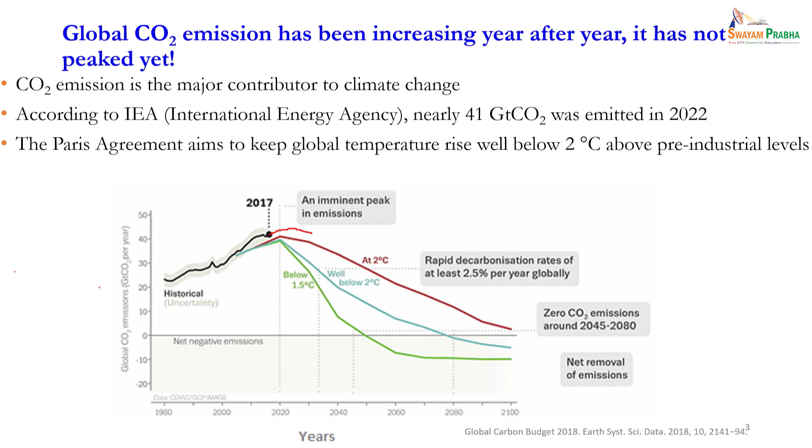If you look into this, if you have to go below 2 degrees, you have to go below 1.5 degrees. If you are supposed to be at 2 degrees, these significant CO2 emission cuts are needed. We will talk about it later, but let's go back to this slide again.

So, what we see here is that in the 5 or 6 year duration in which we will emit another 250 billion tons of CO2 into the atmosphere, it basically means this is the bus which we have already missed. We will not be able to keep the global temperature below 1.5 degrees of the pre-industrial time. So, if in pre-industrial time the temperature was say 25 degrees average, it is assumed that it will become 26.5 degrees average in another 4, 5, 6 years.

So, if we really wanted to keep it below 1.5 degrees, most of the technologies which we have already developed must have been implemented right now. It is not working at this pace. So, this is gone. Let us now look into the 2 degrees scenario. For the 2 degrees scenario, that is, you have to avoid a 2 degrees rise compared to pre-industrial temperature, the carbon dioxide budget which you have is roughly 1150 billion tons.

Now, this is a number; it does not mean that this is the exact number. This also tells you that if you emit more than 1150 billion tons of CO2 into the atmosphere, there is a 50% chance that the global warming temperature will be beyond 2 degrees of what it was in pre-industrial time. So, let us assume 50% chance is what we are now talking about.

Here also we gave that same number. So, 1150 billion tons of CO2 is what you can maximum emit. And this basically brings us to this very important point: this is your lifetime target. It's not a target for 2050 or 2070 or 2100. If anytime in the next 100, 200, 300, 500 years you go beyond this number, the temperature will go beyond 2 degrees centigrade. So basically it means the lifetime target we have is 1150.

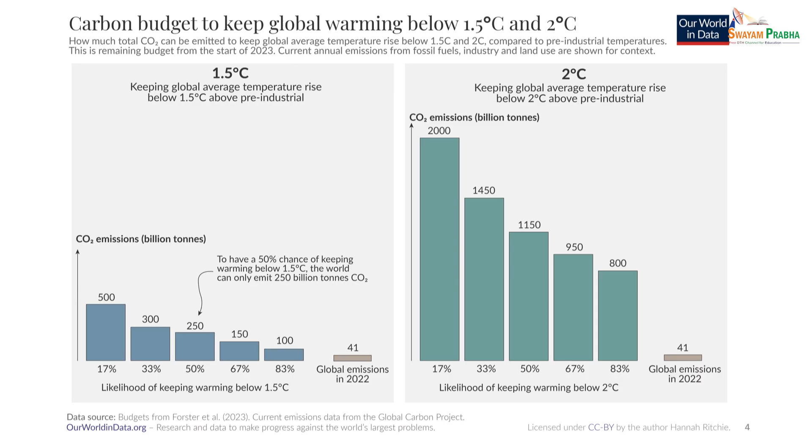So this is why IEA wanted to target this by 2050. If they can somehow emit 50% of what they are emitting today, then they will be able to meet this target and they will be fairly below that 1150 number. That would ensure that the global average would be such that the temperature will not go beyond 2 degrees in the near future. This is the challenge. So 20 billion tons of CO2 cut is the challenge. Now this is the benchmark which we have. If we have to cut down 500 to 700 billion tons of CO2 from today till 2050, what has to be done?

You will have to break down all those sectors from where there is CO2 emission. Power sector is the biggest culprit. Most of our electricity comes from burning fossil fuel, either coal or other forms of fossil fuel, oil, gas, whatever. If you are burning coal, this is the worst, because coal is mostly made up of carbon. You are burning coal to produce electricity, that's the product, but there is another product in this process, that is carbon dioxide. C plus O2 will give us CO2. CO2 is a product. Energy is actually a byproduct which we use. The actual product is CO2.

Now what is the challenge? We are saying that we will run a process where we will capture the product and put it back. This is a big challenge, a big task. So far in human history we have not done anything like that. People typically compare such things with pollution control. Pollutants are typically byproducts, at ppm level. SOx, NOx, carbon monoxide, particulate matter, all of these which we have somehow handled, from the tailpipe of vehicles or from point sources, we have only handled byproducts which are not even 1%.

Today we are saying that we will capture the product itself, and it's not available to you pure. It comes as a 10% mixture with the remaining 80 to 90% nitrogen. This makes it even more difficult. So this is the challenge, and this is why it's a very tricky situation, what you will do so that you will become net zero. This is why the title was net zero, not CO2 capture. We have to always keep that in mind. The focus is on net zero. It's not about CO2 capture, producing more green energy and all. Focus has to be on net zero.

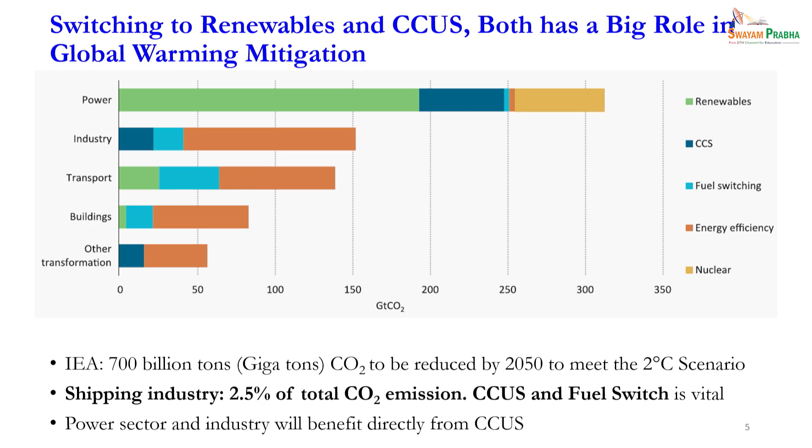So in 2022, if you consumed X amount of coal, in 2023 India consumed 1.08 X amount of coal. So even in today's CO2 constrained world, we are forced to consume more coal, because at the rate we are growing, we will not be able to grow if we stop consuming coal. So this is where that 5% comes from. Let's move on. The take home message of these two slides is: 1.5 degrees is gone. 2 degrees is what we are targeting now.

Now if you have to target 2 degrees, one of the two options in this slide is to move from fossil fuel based energy sources to green energy sources. That is going to reduce your CO2 footprint. And whatever CO2 you are producing because of materials, electricity and all those things, you will have to capture that CO2, utilize it or sequester it. These are the two steps we have to understand. What are the challenges in these two steps?

So first, is it easy to go from a fossil fuel based energy economy to renewable or green energy? Let's look at the data India has shown so far. This data is from 1985 to 2022, and it shows the renewable energy mix of the Indian economy. This renewable energy is basically coming from hydropower. We have done a significant amount of hydropower installation in the last 25-30 years. Solar, wind, biomass, waste, geothermal, wave, tidal, all of these put together, we are actually going down.

With so much talk about biomass, geothermal and all, given the rate at which our population grew and the rate at which we grew between 1985 and 2000, without looking for clean energy sources, we installed a huge amount of fossil fuel based power plants, and this is why in the total energy mix, we started at 25% and went down.

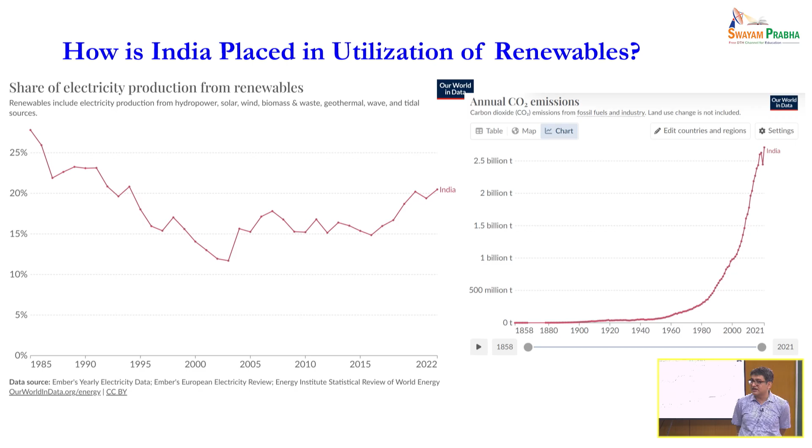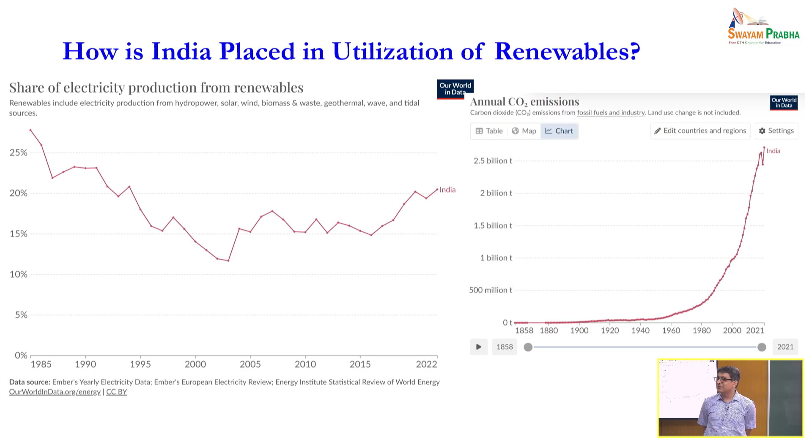And if you are the second largest economy emitting CO2, then the entire onus would be on us to reduce the CO2 emission. Even today, in Azerbaijan, at this last COP, other countries started saying China and India should not be considered developing countries, they should be considered developed countries. As soon as they count you as a developed country, you will have 100% onus on reducing your CO2 emission. Right now there are a lot of funds you can utilize from the World Bank and others. So those challenges are there, let us not talk about that.

Moving on. So this is the story of green energy. I do not want to talk too much, but let me tell you there are other challenges over here, whether these are net zero processes or not, and if it is really a net zero process, for how long it is net zero is what we also have to understand.

So this is the installation of solar. I know that we are increasing nicely, we have not reached our target, but that is not a problem. The problem starts later. When we talk about solar energy, it is an energy which has a plant load factor of roughly 20%. What exactly is plant load factor? Those people who are in industry would understand it better than the students.

Plant load factor means that if I have installed capacity of 100 megawatt, how much I am actually producing from it. For example, in solar energy mostly, sunshine is only 6 hours a day maximum on average. We have to average over the entire year. Summer time will have more sunshine; monsoon time, like in Chennai, from the last 2-3 days we have not seen sun. Winter time in northern India will see no sun for many days. So on average you have sunshine for 6 hours a day.

It basically means you will have to install 5 times what you actually need. It basically means that the plant load factor is 20%. If I install 5 times, only then will I have enough during the 6 hours of sunshine to utilize that electricity for the remaining 18 hours when I do not see sunshine. So this is why the plant load factor of solar energy is very poor.

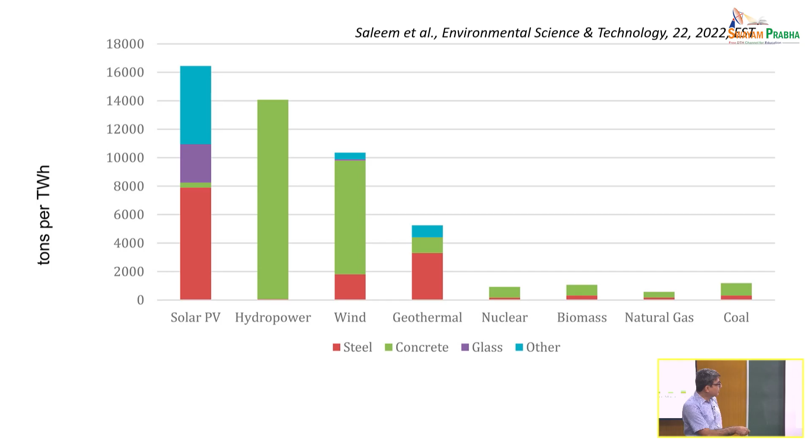So the point I am trying to make, if you now start looking into how much CO2 you have already emitted. These processes will emit CO2 while you are producing the electricity. This process will emit CO2 while you have put the plant itself. So there is CO2 emission in the capital expenditure of this process, and this is during the operation of this particular process. Okay. Now let's look a little deeper.

Typically, when you are producing 1 kilogram of a material in a single step or dual step process, you would roughly produce 3 kilograms of CO2 if you are using fossil fuel to produce this material. For example, on average 1 kg of steel will produce roughly 2.5 kilograms of CO2. So similarly, any other material you produce will have a CO2 footprint. If I am going to produce 16,000 tons of this material to produce 1 terawatt hour of electricity, I am already producing 48-50,000 tons of CO2.

Now you have to understand that we are doing 5 times the required installation, because even though I need only X kilowatt hour of electricity, I will have to install 5 times that because there is only a 20% plant load factor. So that 50,000 of CO2 footprint, 5 times that becomes 250,000 of CO2 footprint. So while these processes do not produce any CO2 while producing electricity, they have a CO2 footprint which has to be divided over the lifespan of the solar panel.

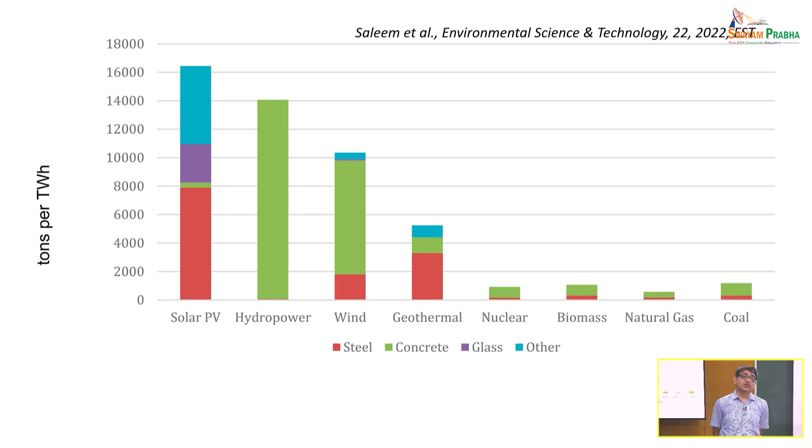Why they have not peaked? Because we are continuously installing new solar panels, new wind energy, all kind of things, even though we have sufficient capacity from fossil fuel. Okay, now when these new installations are coming, and as per this discussion, these new installations are actually adding the CO2 into the atmosphere, it is not reducing. So if these installations are not running for 5-10 years, it is not going to bring it down.

So this is why this peak, you are not able to predict it, because you are not taking into account that the new installation which has to happen has already emitted the CO2 for the next 10 years. Okay. Otherwise, over these 10 years, this fossil fuel base would have slowly emitted those numbers. This you have already emitted at once. So the more you do green right now, the more CO2 will come into the atmosphere at this moment for a short period of time. The challenge will start when you see technology advancement.

5 years down the line, a faculty will tell you, no, I have a solar panel which is 25% efficient. Today you are running a solar panel which is only 15% efficient. Change your solar panel. So 5 years down the line, you will be forced to change your solar panels. So when you are changing your solar panels 5 years down the line, what will happen to the CO2 footprint? Will we become net zero? We will not. This is the challenge.

Okay, and this is bound to happen, because in 5, 6, 7, 10 years time, you will see that the efficiency of the solar panel, even the technologies, will be changing. You will need new technology, more efficient and all. So you will again have to do the same thing. So it's a step where we cannot jump there, we cannot reach there, that we will become net zero by so much time. It is a step change. It takes time to do all this. It does not happen automatically.

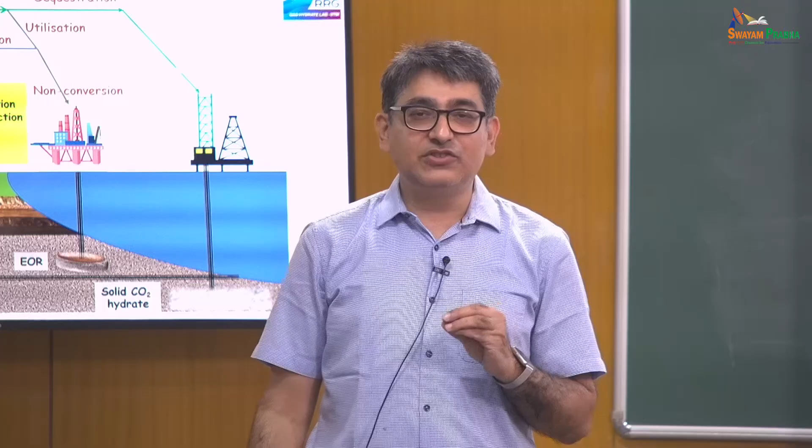So this was the story of green energy I wanted to tell you. The take home message is, don't assume that green energy is 100% net zero today. It's not. Okay. I gave an example of a solar panel, but if you talk about a turbine or anything else, for the blades, you don't know how much material has gone into those blades, and those are not simple blades. They are designed materials, which basically means that these materials have gone through 5 different steps. Carbon fiber goes into it.

Where do you get the carbon fiber? Does it grow on a tree that we will get and put there? No, it does not happen. This carbon fiber has gone through multiple steps, high temperature processes and all, and has emitted a huge amount of CO2 which we are not counting today. Okay. So each of these materials are the solutions which will make us net zero. I am not saying that they are not going to make us net zero. They will make you net zero, but it will take some time. Right now you are emitting all the CO2. So this is why this peak prediction is very difficult for us to do.

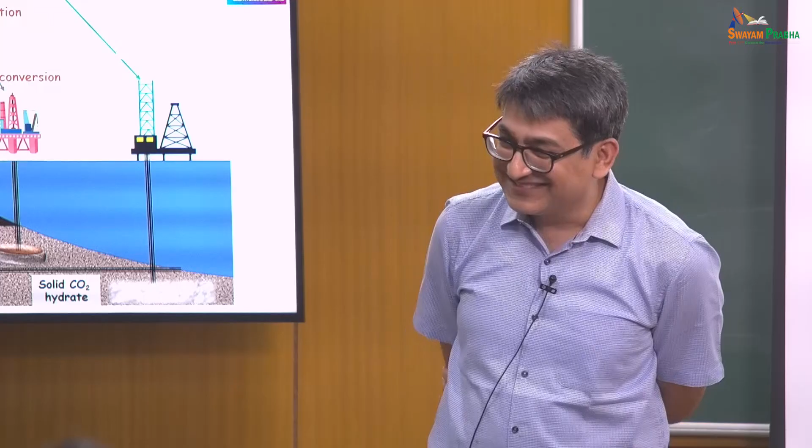So that green energy thing is done. Let's now look at CCUS, because this is another area and one focus of this particular class. How much time do I have? Okay, no, I have enough time, don't worry. I will talk about the problems first, solutions we will talk about slowly. Solutions are difficult to come by, it's easier to explain the problem.

Okay, so now when we talk about carbon dioxide capture, utilization and sequestration, CCUS, this is actually a 3-step process. What exactly it means is that first you will have to capture the carbon dioxide. Most of you are chemical engineers, it's basically a separation process. We are separating carbon dioxide from other gases. Okay. What are these other gases? The other gases which come out during the combustion of coal.

Why do we have to worry about it? Because coal is a solid. Okay. And you have to burn the coal with a gas. The other reactant is a gas. So when I have to react a solid with a gas, there is a problem. As a chemical engineering problem, there is a bigger problem, because a solid has millions of molecules in this much space and a gas has few molecules in this much space.

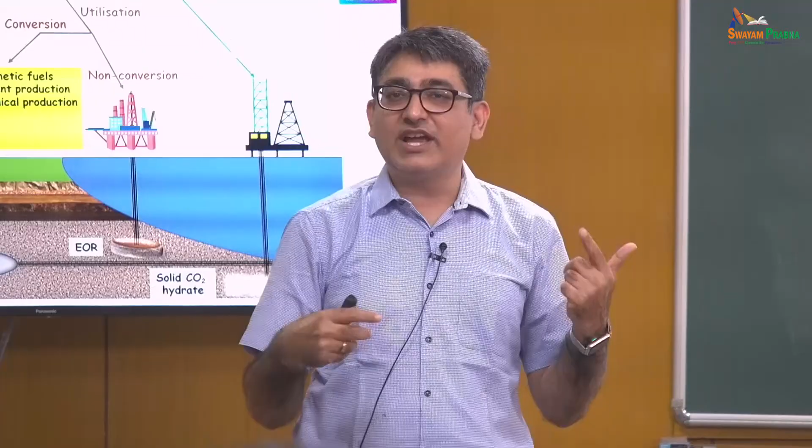And if these two have to react together, the reaction has to happen 1:1. So if I have to make this true, that is, the reaction has to happen 1:1, I have to compress the gas, and I will have to pulverize the coal. Both I will have to do. So this is why the combustion typically happens with excess supply of air.

If it does not happen with excess supply of air, then instead of carbon dioxide you will produce carbon monoxide. You don't want that, because it is a poisonous gas. CO2 at least is not a poisonous gas. It's loved by the plants. So you might die, but plants will survive. The human civilization will evolve again, which has happened multiple times. So it should not be a problem. You don't want carbon monoxide to come out from this process. So this is why it's typically done at a very high pressure or excess supply of air.

Now why air? We could have done it with oxygen. It would produce only CO2 and a little bit of additional oxygen. Would that have been better? Maybe it would have been better, but when these power plants were designed some 40-50 years back, they said, oh, there is only 20% oxygen in the air. If you have to separate oxygen from the air, it will be very expensive. Why do that? Let's burn it with the air itself.

So 40 years back, we were worried about separating 20% oxygen from the air for combustion of coal. Today, we are ready to capture 400 ppm carbon dioxide from the atmosphere. So this is the story. What can you say? So this is the challenge. Air is what is now being used.

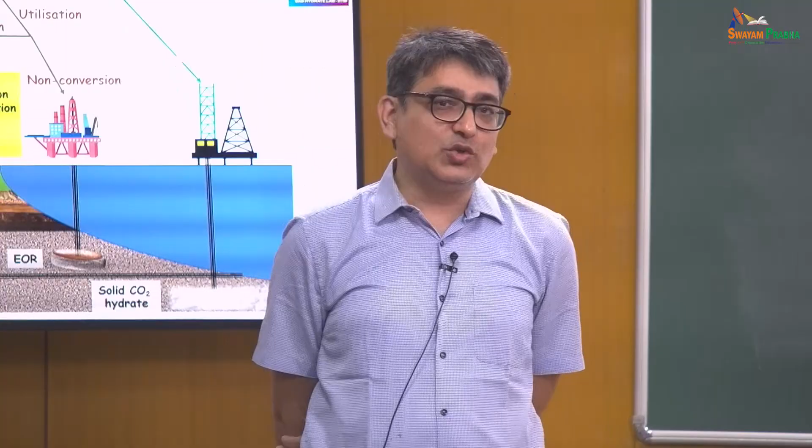When you are using air, it has roughly 80% nitrogen, only 20% oxygen, and on top of that you have to have excess air. So 80% becomes 85%, 90%. By the time the combustion happens, you will see that there is only 10% or 12% carbon dioxide, and the remainder is nitrogen. So the CO2 capture process is basically a separation process, a classical chemical engineering process of separating two molecules. Minimum two molecules will be there, one is CO2 and one is nitrogen.

But in reality, there are many molecules. CO2 is there, nitrogen is there, SOx is there, NOx is there, oxygen is there, all kinds of stuff that will actually kill you. But let's not worry about that. Right now, let's make it very simple. We have two molecules, carbon dioxide and nitrogen. Now the challenge is, there is a proverb: if there is a rotten apple in a basket, every other apple gets rotten.

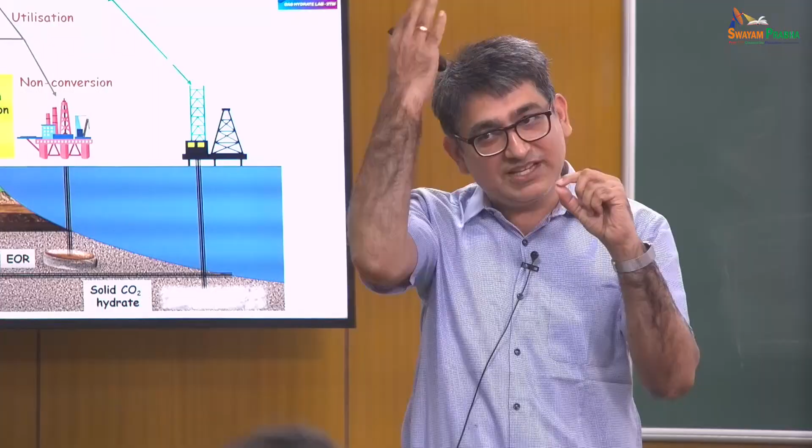So when one CO2 molecule is in the vicinity of 9 nitrogen molecules, this CO2 molecule will start behaving like a nitrogen molecule. You know why? Because the nitrogen molecule at room temperature has very high thermal energy. It's a small molecule. If you give a little bit of energy to it, it will jump like anything. If you are very light, you can jump. If you are heavy, you will not be able to jump. So at room temperature, it has a very high kinetic energy, and with that kinetic energy it goes and bombards the CO2 molecule. So CO2 molecules also start jumping like nitrogen molecules.

So what I was trying to do is capture a CO2 molecule from this mixture. If I have to capture someone and this guy is running, we need more people to capture him. This is the challenge. When we talk about capturing CO2 from a flue gas, a point source, there are roughly 9 nitrogen molecules per CO2 molecule. If I have to capture one person among 9 others, it's not that difficult. I should be able to employ 5 people and they will run and catch that particular guy.

But the second problem is, what if we have to capture one among 2500? What is that problem? That is direct air capture. This is the elephant in the room. People say direct air capture is the future, because we have already produced all the carbon we wanted from under the ground. Now there is plenty of carbon above the ground. Why unnecessarily dig under the ground for carbon? Let's capture all the carbon from above the ground.

We will convert it into chemicals by adding hydrogen. This is what CO2 utilization is. This is what has been talked about. The US is pumping billions of dollars. They give $185 as subsidy if you are capturing 1 ton of carbon dioxide directly from air. Okay, but look at the thermodynamics.

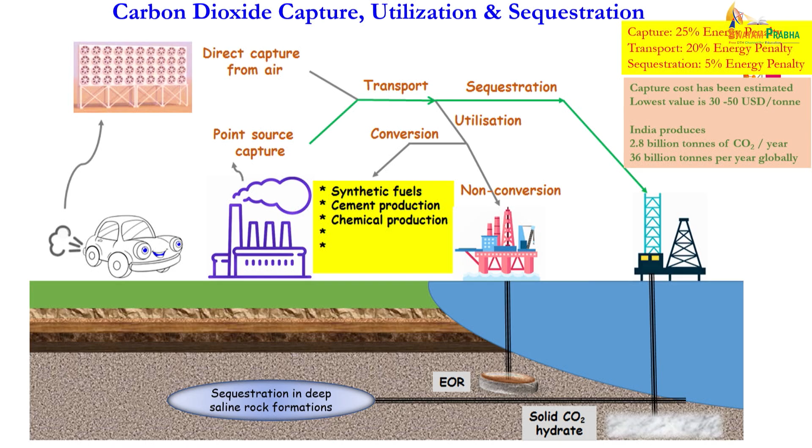Cost obviously is one which I have stopped talking about. The cost here, for example, the direct point source capture is roughly $30 to $50 per ton, or in terms of Indian rupees, it turns out to be roughly 4 to 5 rupees per kg. You have some representative from Technip, they may claim that they have a 3.5 rupees process, but I will tell you it's roughly 3.5, 4, 4.5, not less than that per kg. It comes out to be roughly $30 to $50 per ton from point source. And I am not even talking about many other processes which we will see later.

If I am going to capture this from here, the subsidy given is $185. So you can imagine what will be the actual cost. Now in India, if I have to capture 1 billion tons, multiply it by $50, how much money will get consumed? But at the end of the day, I am trying to say that all this is possible if we are aware of what we have to achieve. We should be able to achieve it if we know what we have to design it for. The designing has to be done for net zero, nothing else. If we are not designing it for net zero, it will not become net zero. All this I have already discussed, I will quickly move on.

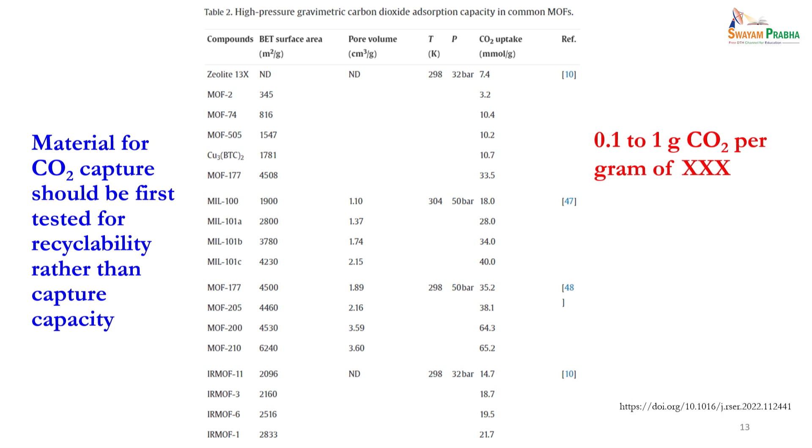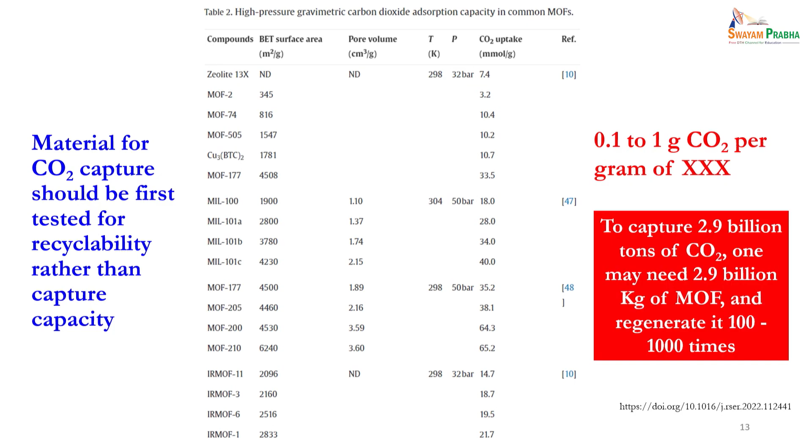This is the material. For example, you will have some zeolite, some metal organic framework. Typical number is 0.1 to 1 gram of CO2 per gram of adsorbent. So if I have to capture 2.9 billion tons of CO2, I need 2.9 billion kilograms of MOF, and regenerate it 100 to 1000 times. You don't even know how to generate an MOF, for example, or any other exotic material. In labs, it takes 1 day, 2 days to produce 1 gram. I am not talking about the time here. I am talking about running it for 1 or 2 days using the same energy which comes from fossil fuel. Look at the CO2 footprint of this material. This material has not 3 kilograms of CO2 footprint, it has 10 kilograms. And this is the same story for all those carbon fiber reinforced wind turbines. These challenges are there.

Industry says that we have monoethanolamine, diethanolamine and all those things, and Technip, the solution they might tell you is an amine based solution. We also talk about it, we also do similar research. But let us look at the challenge over here. This is the molecule which is supposed to be the God molecule in this particular case, which will capture all our CO2 and get rid of all our problems. But where does this molecule come from? Does it come from air? It does not. We will have to produce this molecule. How will we produce this molecule?

We have to produce this molecule by reacting ammonia and ethylene oxide. The ammonia which currently produces monoethanolamine, is it green ammonia? Not green ammonia. It is grey ammonia, black ammonia, and you know the ammonia process is 300 bar, 300 degrees centigrade. Can it be done without CO2 emission? So first this monoethanolamine has to capture the CO2 coming out from the ammonia processing, then from the ethylene oxide processing, and then if it is still around, it will capture the CO2 from here. That means if it gets consumed in doing this, then this CO2 will remain. So this is a challenge.

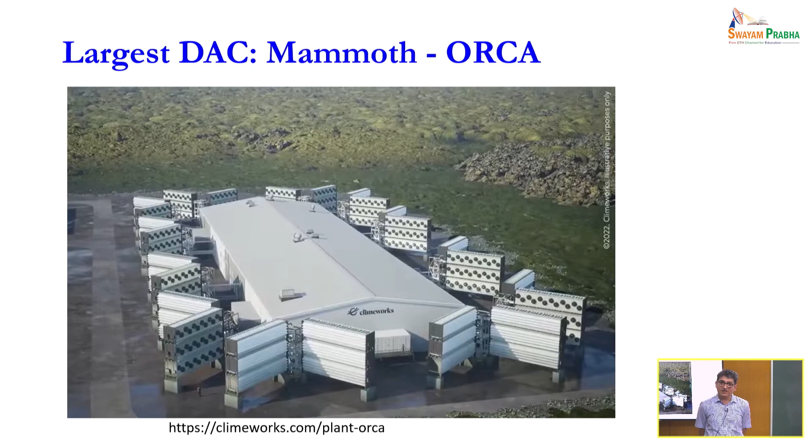This is the largest direct air capture plant, which is called Orca, in Iceland. Beautiful plant, excellent technology. How much does it capture? It captures 4,000 tons of CO2 every year. Tell me how many tons of cement and steel have gone into production of this plant. This plant has already emitted 10 years of the CO2 it can capture, maybe more.

Is it net zero? Maybe if it runs for 50 years. But do you think it will run for 50 years? The technologies which are being used, Gen 1, Gen 0 technology, what we will call it, do you think it will be running for 50 years? I doubt. Maybe we can change the material, the construction will be there, but if it is corrosive material, will it...

I will tell you, oil and gas, many of you are from there, these amine based processes which are being utilized to capture CO2 from natural gas, hardly 5-6 years is the lifetime, they change it. They make a lot of money, so they change it, they do not bother. Here you do not make a lot of money, these are all money consumers, so you will not be able to. So these are the challenges.

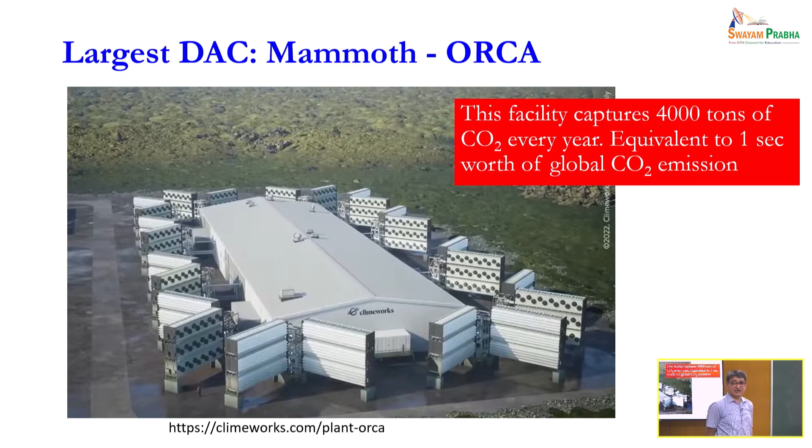Forget about the remaining slides. So we do all that in our group over here, so I don't want to do marketing in this particular class. Let's move on.

So when we talk about CO2 capture, we know now that we have to generate a material to capture CO2. What if we don't generate a material to capture CO2? Because if you are generating a material, 1 kg of MOF, you will produce 10 kilograms of CO2. Your net zero becomes not a possible solution. But if I do not generate a material, I take a material which already exists, then I do not emit those 10 kilograms of CO2 for that 1 kilogram of material which I have just used.

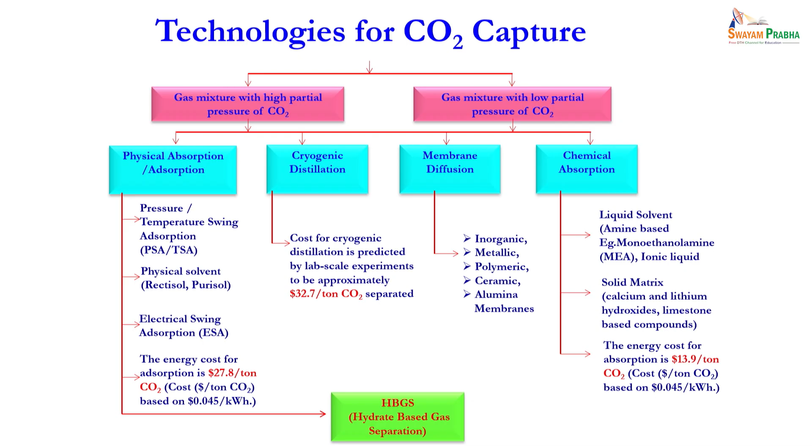So there are different solutions, different compositions of CO2, oxygen, nitrogen, hydrogen, H2O, CH4. I do not want to go into each of these. Depending upon the concentration of CO2, you have different solutions. One of the best ways of capturing CO2 is not going for a chemical route, but going for a physical route. What is the physical route and what is the chemical route? Chemical route basically means that the CO2 is going to chemically react with the material in which it has to be captured.

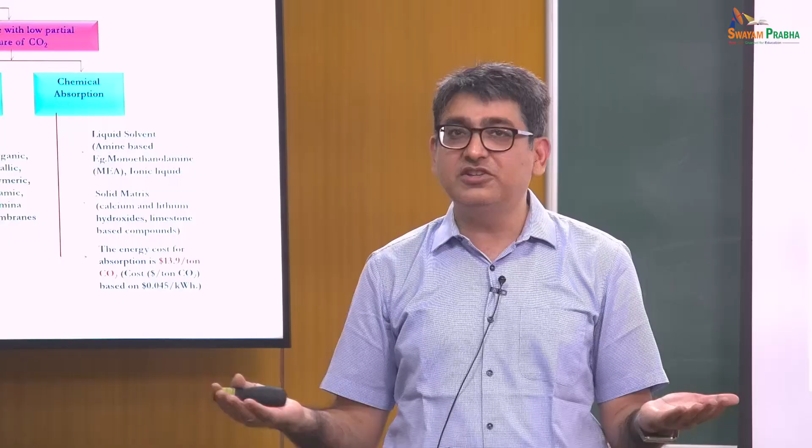So if I have a mixture of CO2 and nitrogen, I have two options. I expose this gas mixture to a material which chemically reacts with CO2. This is called the chemical route. Why do we need this material? We need this material because the binding chemical energy is much stronger. So even if my concentration of CO2 is low in my feed gas, if I am using a chemical, it will be able to react really fast.

Why is fast important? Because we are talking about tons and tons of this material. You need kinetics which are really fast. Otherwise your CO2 molecule will run away, you will not be able to capture it, you will have to capture it really fast. So you need a material which has very fast kinetics. And which material will have very fast kinetics?

If it is thermodynamically very feasible at that temperature and pressure condition, a chemical reactant will be able to achieve this much more easily compared to a physical adsorbent, which separates by dissolving it in a larger quantity compared to nitrogen, or adsorbing it in a larger quantity compared to nitrogen. So when we talk about a physical approach, molecular recognition is there to a certain extent, but it's not 100% molecular recognition.

When we talk about chemicals, it recognizes the molecule and it captures it. It will not capture even a single nitrogen molecule, because that recognition ability in a chemical is much better compared to a physical material. A physical material will capture based on van der Waals interaction. And van der Waals interaction will be there in every molecule, whether it is a small molecule like nitrogen or a large molecule like CO2.

Both of them will have van der Waals interaction. CO2 will have higher van der Waals interaction, so it will be able to capture faster compared to nitrogen, which is slightly slower. So in this process, physical process is more about enrichment. It's not about complete separation. Okay, so typically if you are looking for 100% separation, you will have to go for chemical approach.

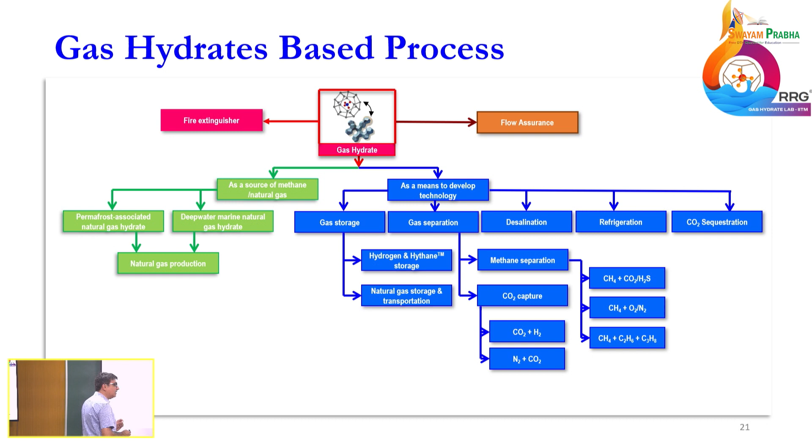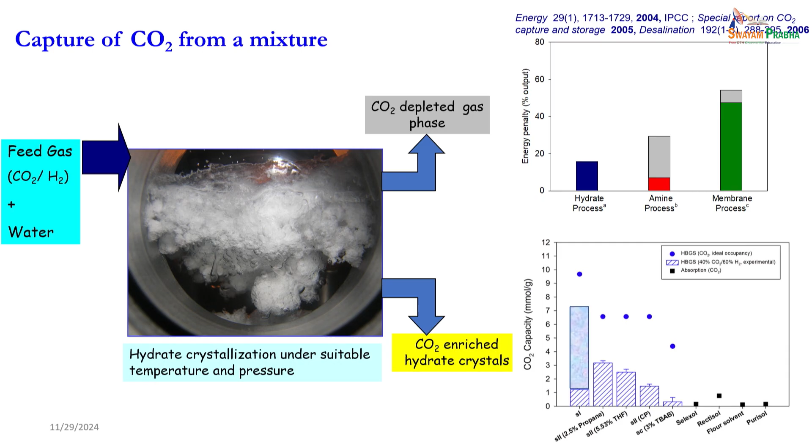Gas hydrate is one such process where you do not need to generate a new material. I am using water, not fresh water. I can use sewage water, effluent water, sea water, any water, it does not matter. I will be able to bring this water and this gas mixture together, and this would convert into this kind of hydrate. Once this converts into hydrate, I have achieved 2-3 things. Where the advantage comes from in this process, I will tell you. 3 things I have achieved.

First, I have purified the water, because once hydrate forms, it will only form with the pure water molecules. So all the water molecules will come together and form these ice-like crystals. So if I separate out these crystals and dissociate them, I have got pure water. That's one thing I have done there.

The second thing: when I have a huge amount of solar energy available for a 6-hour period, I can form a huge amount of hydrate during those 6 hours. I have stored all that energy in the form of the enthalpy of hydrate formation. Because when I have no sunshine and I dissociate this hydrate, it's an endothermic process, so my temperature will keep going down, and I will be able to do my cooling, all the things which require 60% of the energy of a building.

So first, I separated pure water from contaminated water. Second, I have stored a huge amount of solar energy, which I would otherwise need batteries or something else to store, so I have stored it already in the form of hydrate. And the third is the separation of gas, which was our main goal.

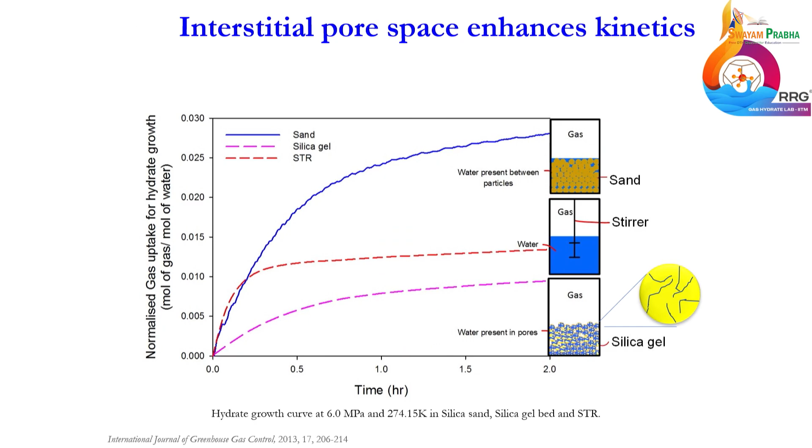Okay. So that's all from me today. We will not talk too much about all of these. There are a lot of fundamentals on hydrate. Should we go for another 5 minutes, Jitendra, if you allow?

So if I have a mixture of carbon dioxide and nitrogen, and it forms a structure I hydrate, the CO2 will easily go into the large cage, and nitrogen will also go into the large cage. But nitrogen is a small molecule and the cage is large, so it has free movement. I would have to really pressurize it for it to remain in that cage. If I don't go to high pressure, the nitrogen will go in and come out. It will not really get stored in there.

The same cannot be said for CO2. At moderate pressure also, CO2 will go into the cage and sit in there, because the size is bigger, and because of the pressure. See, there is a chemical potential difference. There are 2 ways we can understand it. If I have a cage which is empty and all the CO2 is outside, what does the chemical potential difference tell you?

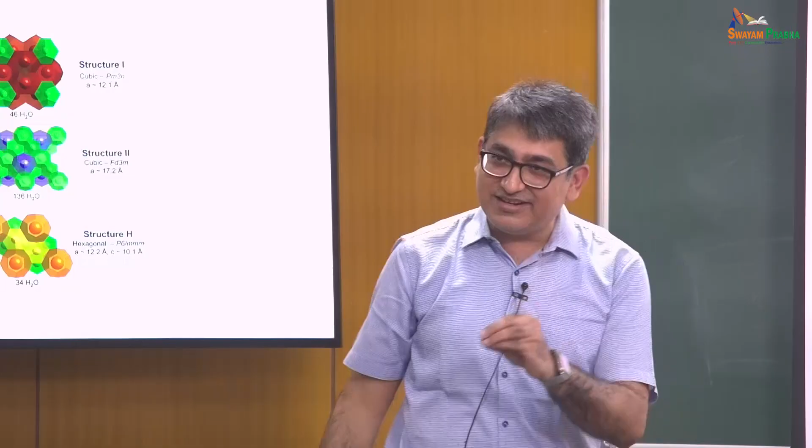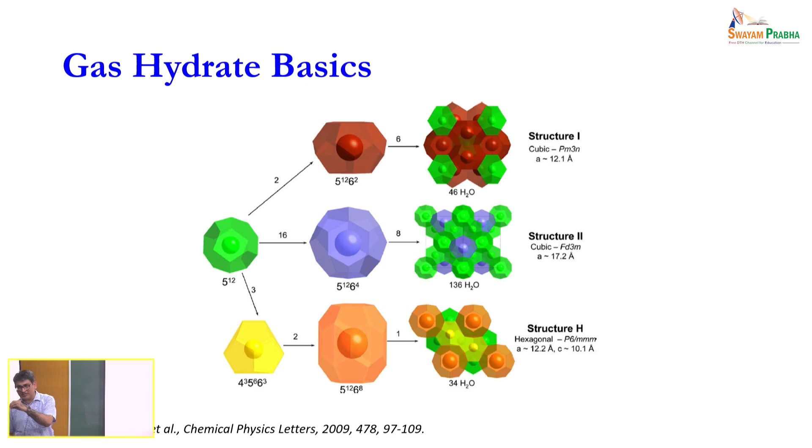So now those who are not in hydrates, they will find all this boring, but those who are in hydrates, we can have a separate discussion on some of these things. Okay. Similarly, we can separate CO2 and methane and all; what exactly is required has to be thought through step by step, then everything can be designed.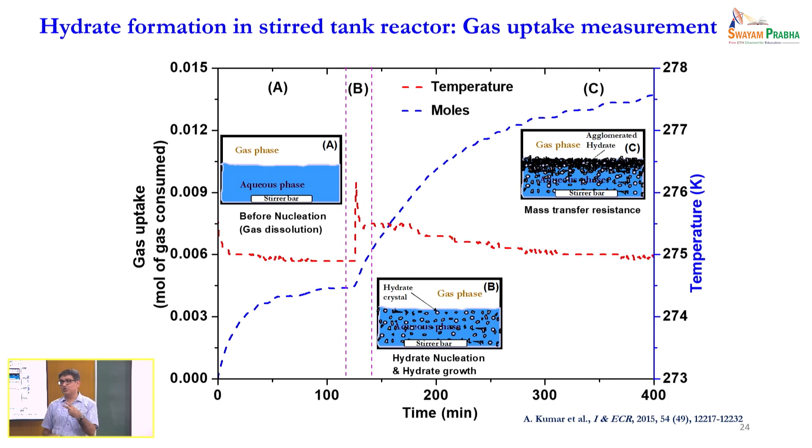So in a hydrate process we typically design two things. One is a classical chemical engineering process where there is a multi-phase, multi-component system. When you talk about a multi-phase, multi-component system, mass transfer and heat transfer become a big challenge. Why mass transfer? Because a gas has to diffuse through the liquid.

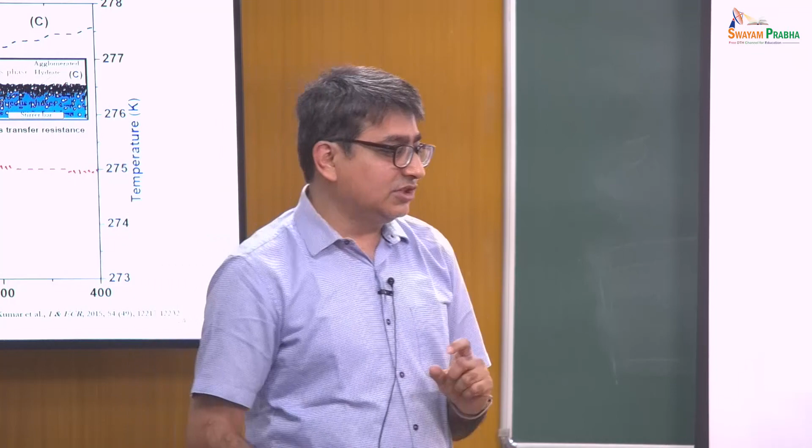Now there is another piece of information which I will give you, and I will try to stop in another couple of minutes. Water, being 18 molecular weight, should not be in liquid phase. It's in liquid phase because of the hydrogen bonding. So if I have to enhance the diffusion of gas in liquid water, one best option for me is to weaken the hydrogen bonding between the water molecules, so that other gases will be able to diffuse faster.

And this is what is basically being done by using some surfactant. A little bit of surfactant is added into the water, so that the hydrogen bonding strength goes down, the viscosity goes down, and it will be easier for the CO2 or other gases to diffuse into this. But the same thing will not work when you are going to use THF, because THF will dictate everything. So all those challenges are there. Moving on, too much detail.

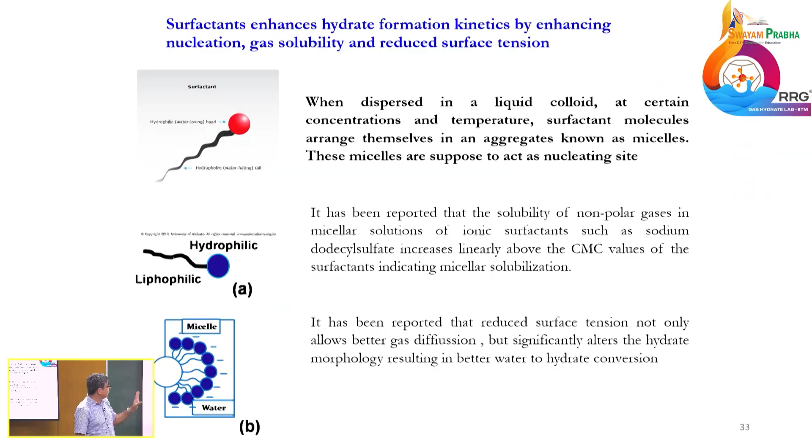So we have developed some processes of CO2 capture. We are trying to do a scale-up of this. This only works when you have roughly 25 to 30% CO2, remaining nitrogen and hydrogen. If you have only 10% CO2, this is a very expensive process. You will not be able to achieve the same amount of input from there. That's all we have. We can talk about CO2 sequestration, but not for today maybe.

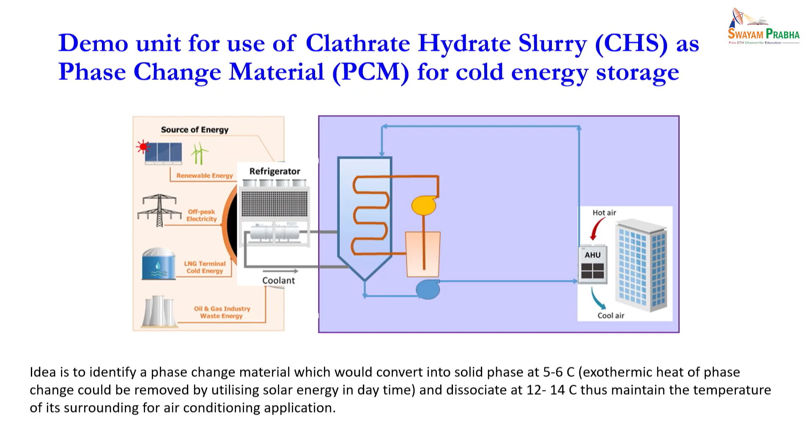So some of the other demonstration units which we have had in our lab, again no need to do any advertisement among the students. These are basically there to get money from industry.